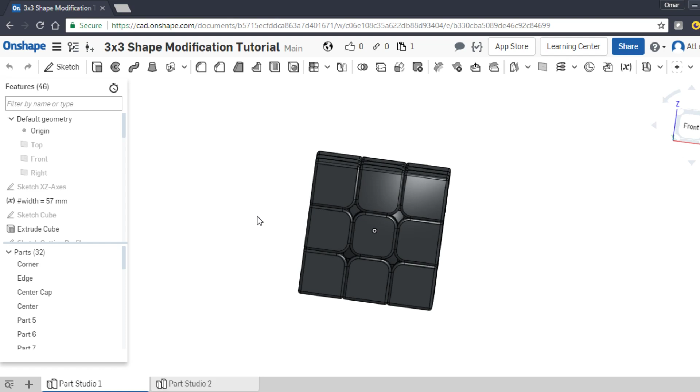In part 1 of the series, we took an existing 3x3 design and we copied the edges, the corners, and the centers around the cube in circular patterns, and we produced this model here, which is 26 parts with their center caps, a total of 32 parts.

The reason why you want to do that is because when you're doing shape mods, you don't know how unique things are—sometimes different corners look different from one another, so you can't just have one corner. You want an instance for each of the 8 corners, because potentially each one could look different. That's why you want to do this.

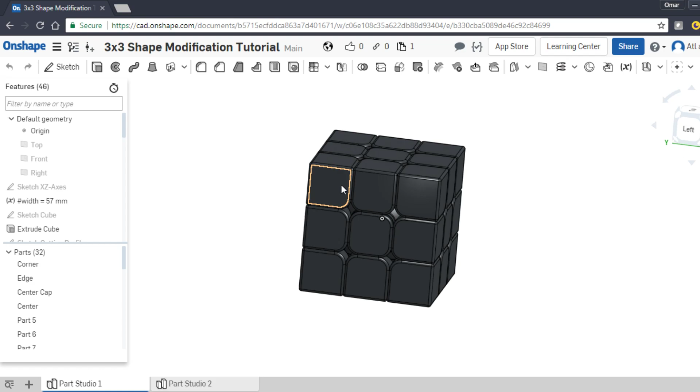Before I get started, I wanted to talk about the inspiration of this series. I watched a series of video tutorials on a YouTube channel called rcpongo. I think the channel owner's name is Troy, and it was a great series. It's basically what inspired me to make this.

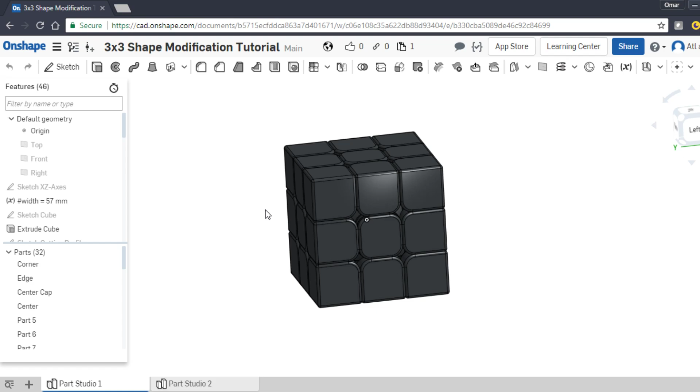The difference is, he uses a tool called Blender, which is a mesh modeler, sort of for 3D design, but it can also do puzzles. Since Onshape is a CAD tool, I wanted to make a version of what he talked about just using Onshape. I think that's also beneficial. You can check out his series—it's extremely useful, basically the inspiration of this series.

To get started with this video, I just want to scroll down at the bottom and highlight all the features that we skipped. If you remember in the last video, I'm going to delete those—highlight them and delete them because we don't need them. I'm going to get rid of them.

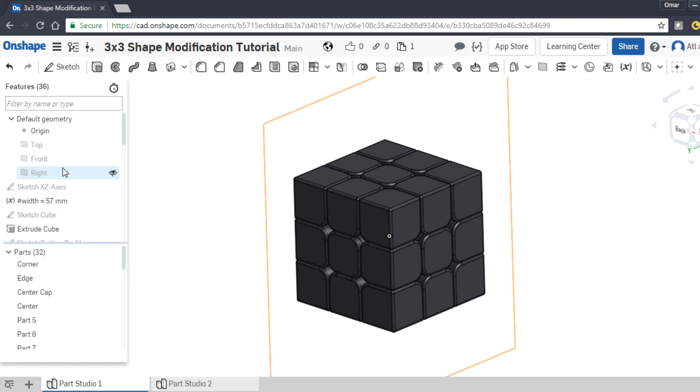Now I'm going to edit this sketch cutting profile. Double click on it, and let's go normal to the sketch.

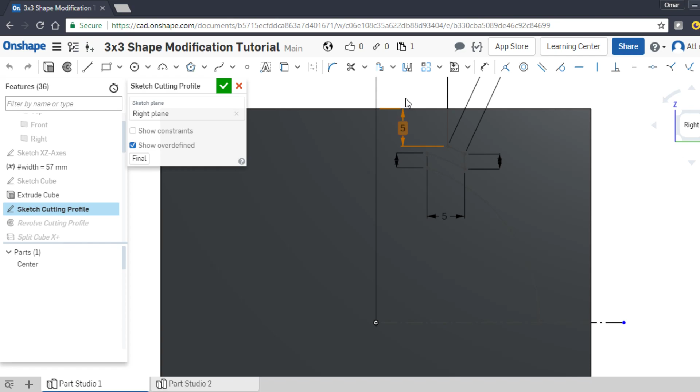If you zoom in, you'll notice there's a constraint here that says 5 millimeters under the surface. That means your mechanism is always going to be 5 millimeters under the surface of the cube. Since I want to enlarge this cube and make it much larger, I don't want the mechanism to extend and always be 5 millimeters under that larger cube.

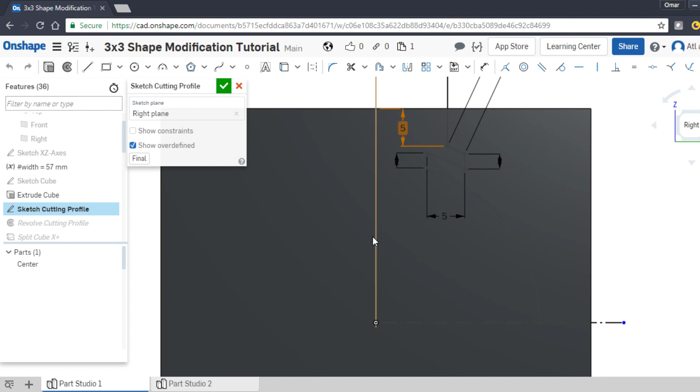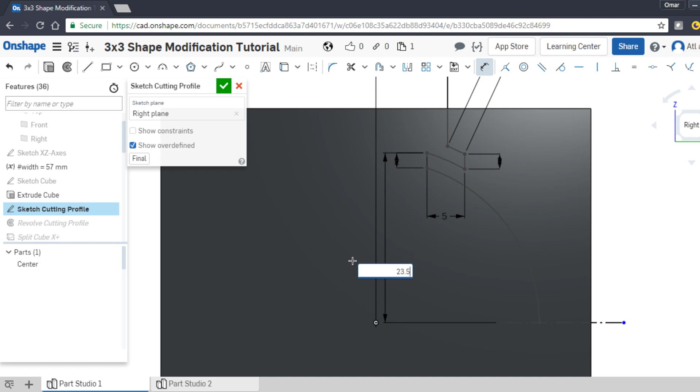I want it to remain the same, not ever change. So go ahead and delete this 5 millimeters and add a dimension from here, click on the x-axis. I would have thought this would say 23.5—make sure it says 23.5 and click OK. I must have changed something that changed that number, but anyway, click OK.

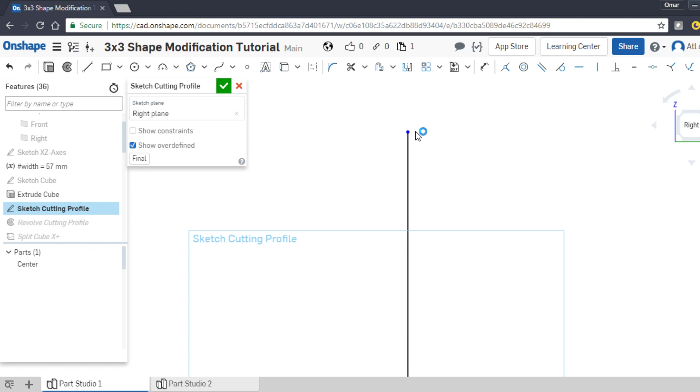It's going to take a little bit to recut the cube. The other thing I want to change is, if you edit the same sketch, I want to zoom out and extend this line by a lot—you need to increase it significantly just in case—and click OK. It should generate, and nothing should change from this one.

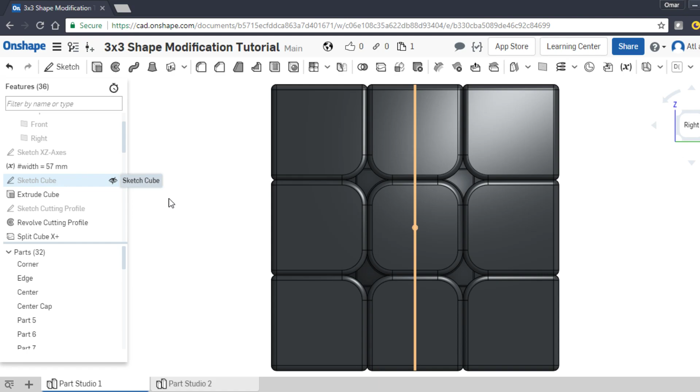Okay, good. Alright, let me go ahead and hide the sketch. If you remember, we sketched a square and extruded it to form the cube. This is this sketch cube.

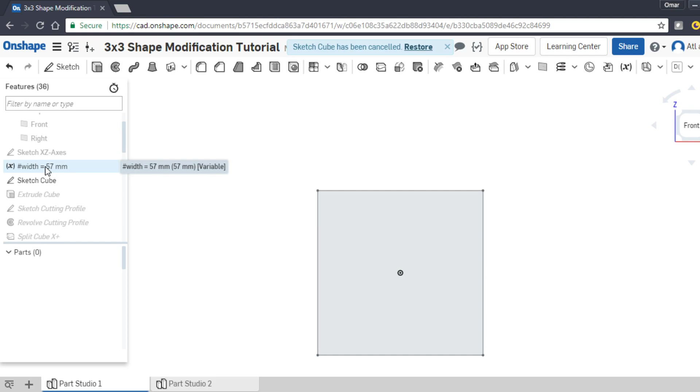This guy is set to 57 millimeters, but it's actually not a hard-coded value—it says pound width, and this pound width is this parameter here. This says 57. So if I increase this to 120 millimeters and click OK...

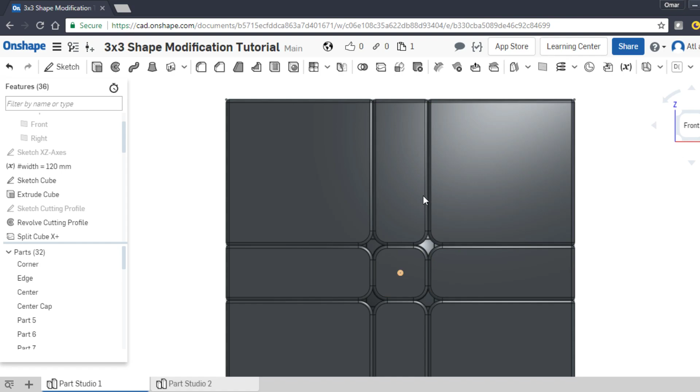It should increase the sketch of the cube and extrude it, and now I should end up with a much larger cube. That larger cube will still have the original proportions of the 57 millimeter, but it's actually much larger—it's going to look something like this. Let me go ahead and hide the sketch.

Okay, so this is great—this is what you want. We're going to treat this as a blueprint that we're going to use to cut any shape cube that we want.

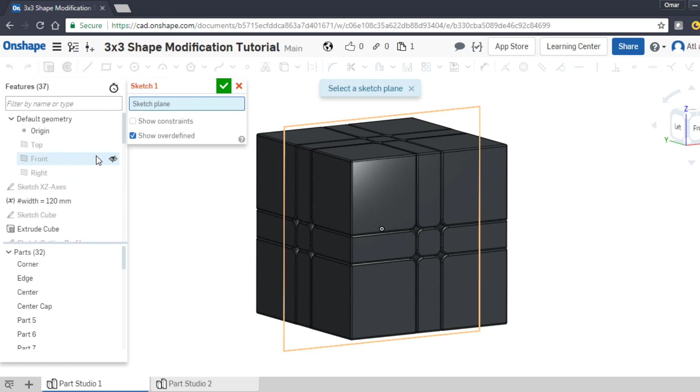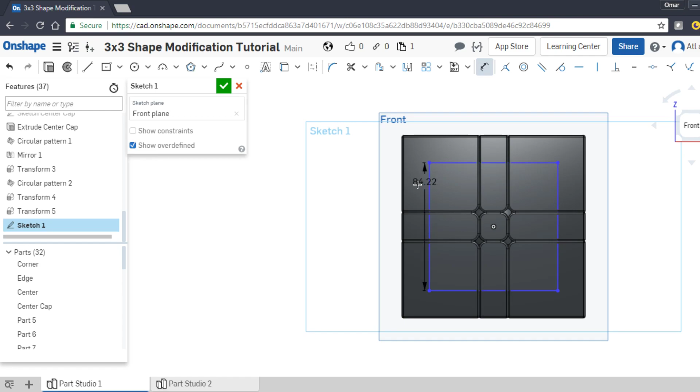Okay, so we created this. The next thing I want to do is create a cube inside, a solid cube on the front plane. Choose the front plane for a sketch, create a center rectangle, choose these two, make sure they're equal, add a dimension of 57, click extrude, make sure it's symmetric by 57 millimeters, and click OK.

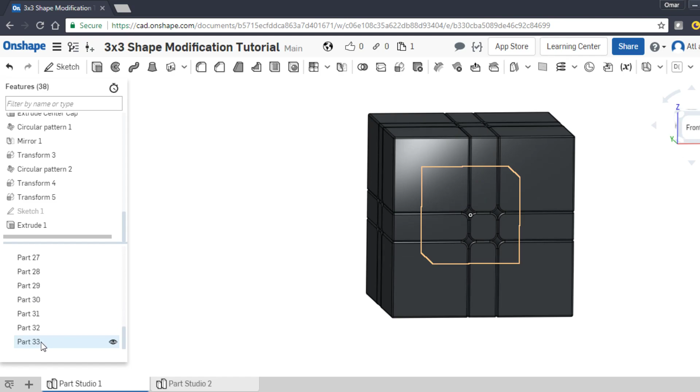We created a solid cube. Let me hide the other parts. This is what we created - a solid cube inside of that larger cube we created earlier.

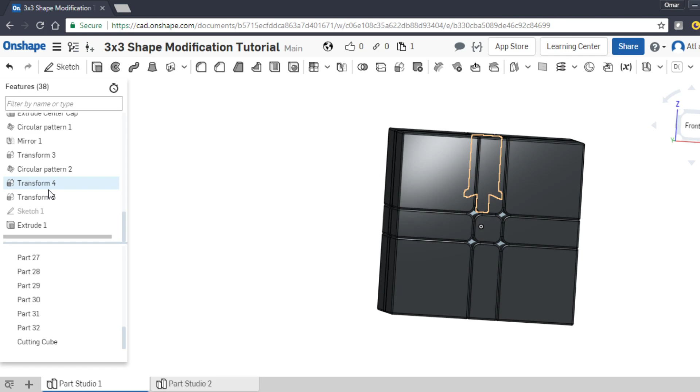I'll show all parts again, and let me quickly rename this to cutting cube. The idea is that smaller blue cube inside is going to be used to cut the mechanism out of that larger cube.

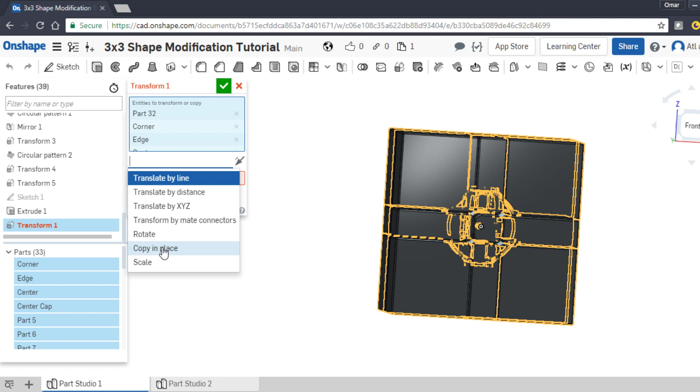If you want, go ahead and highlight these 32 parts, right click on them, and choose transform, then copy in place from the dropdown. It's going to make a copy of all of them. This count of 33 should almost double now, going to 65 maybe. It's going to take a while.

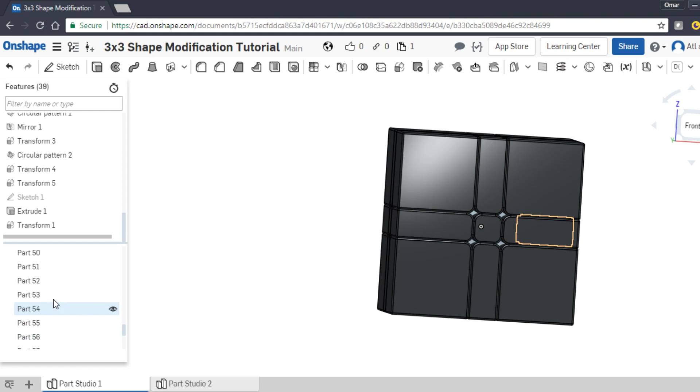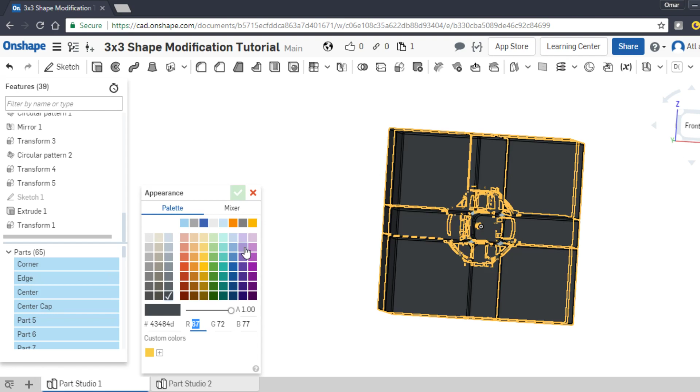65, that's correct - we have a lot more parts now. This next step is optional, but I highly recommend it. Above the cutting cube, part 33, everything from part 1 to 32 is the original part. I'm going to right click and change the color to something significantly different - purple.

Now everything is purple, but what you need to know is if you hide a part, for example part 9... oh that didn't work, sorry.

Once we've colored those purple for the cutting cube, choose everything after - part 34 on, hold shift, select those, edit appearance, and put those back to gray, then click OK. So now if I hide this part, you'll see the copy - you basically have two parts stacked on top of one another. The copy is black or gray, and the original we changed to purple. I just changed the colors so we can tell which is which - that's optional, I just didn't want it to be confusing.

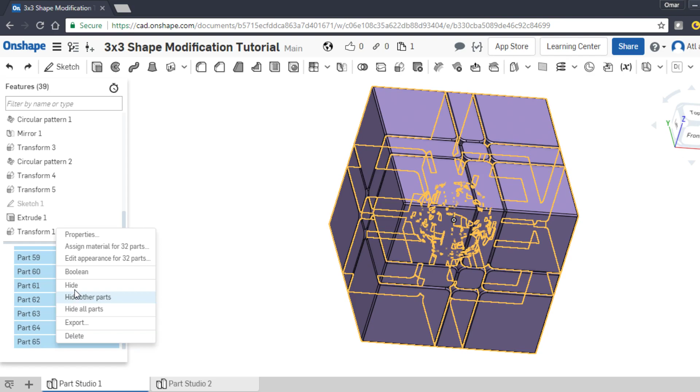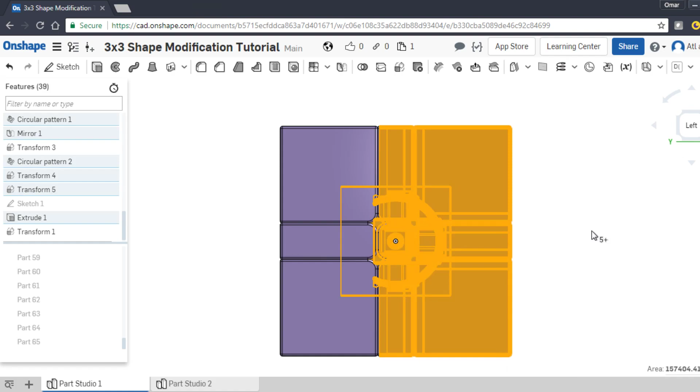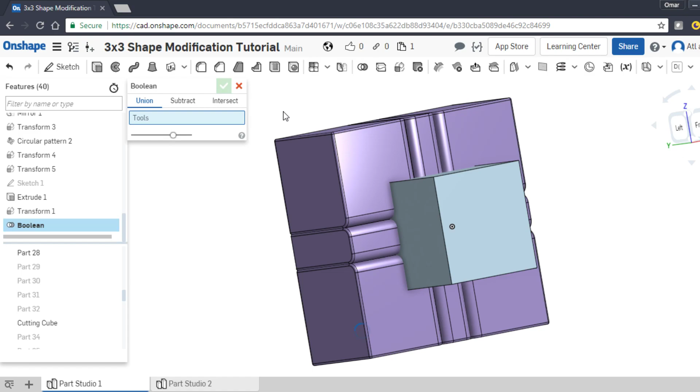So choose all the copies and let's hide them since we don't need them for now. To explain what I'm trying to do with this setup - it's more preparation, unfortunately - let's choose one layer and right click to hide it. Okay, so I had two layers, and let's show our cutting cube real quick. Here we go, here's the cutting cube.

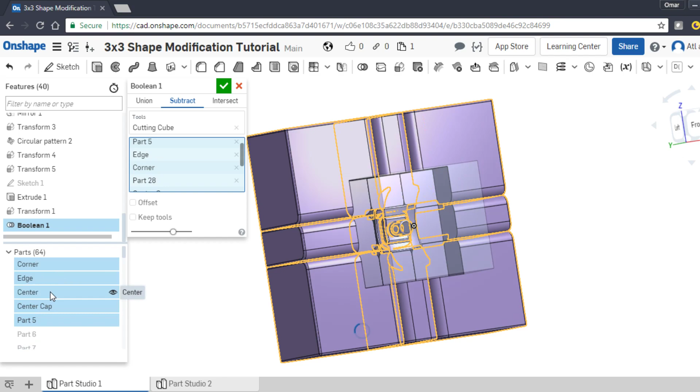The idea is we're going to use Boolean tools to subtract this guy from these 9 parts, something like this. I think I missed a part - I missed a center, here we go. Click OK, and you'll see we created a profile of a 3x3 cube in a way, if that makes sense. We're going to take this profile and cut it out of the copy we made, the black parts, and we'll end up with a cube.

Hopefully that makes sense - I'll talk about it in more detail in the next video. I'm sorry, I made parts 1 and 2 sort of like preparation for the design. I hate to create very long videos. I feel like it's easier for me to make shorter videos, giving you guys stopping points to track instead of watching a long video. But anyway, it's a preference - let me know in the comments if you disagree.

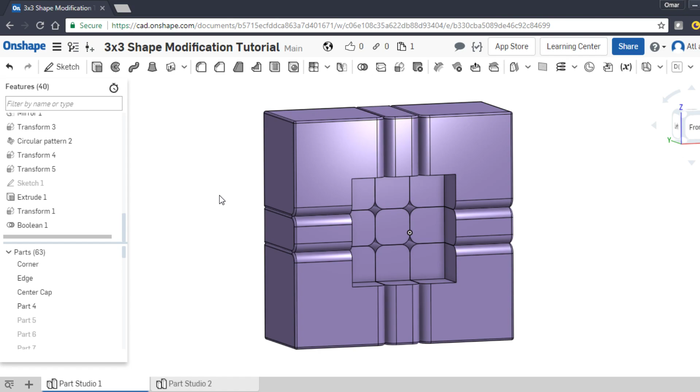I want to stop this video here and in the next part start designing the actual shape, parts 3, 4, 5 and so on. I hope you enjoyed this video - let me know if you have any questions in the comments, and I'll see you in the next part. Thanks.